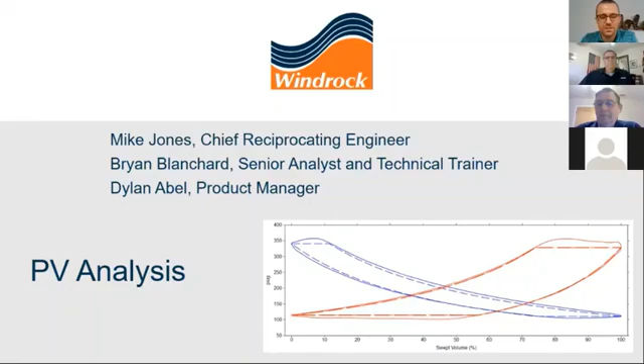My name is Dylan Abel. I've been at Windrock for about 8 years now, worked a few different positions from online systems engineer, doing installation and commissionings in the field, tech services manager, and now most recently I'm our product manager. Now I will hand it over to Mike for his introduction.

Hey guys, it's good to see you all again. I'm Mike Jones. I've been with Windrock for 15 years. This is my 15th year, and including the time that I spent mechanicking and doing analysis, it'd be 50 years in July. And I've used all kinds of analyzers and tested just about any kind of compressors and engines you can think of. So I'm really excited to be able to help you guys while we're sitting at the house doing homework anyway. So this is really a nice venue. I appreciate you guys coming and joining us.

Thanks, Mike. Now we'll hand it over to Bryan here. Hey, good morning, guys. Bryan Blanchard out of New Orleans, Louisiana. Been in the industry for about 45 years. Been analyzing about 39. Good to have everybody here. Hopefully we can teach you a little bit something.

All right, awesome. Thanks, Bryan. A little outline of what we'll go through today. We'll go over a little bit of company background and our product portfolio, just kind of quickly here at the beginning. Then I'll hand it off to Mike and Bryan, who will go through PV diagrams and curves, actual versus theoretical, some of the calculated parameters, and then fault diagnosis.

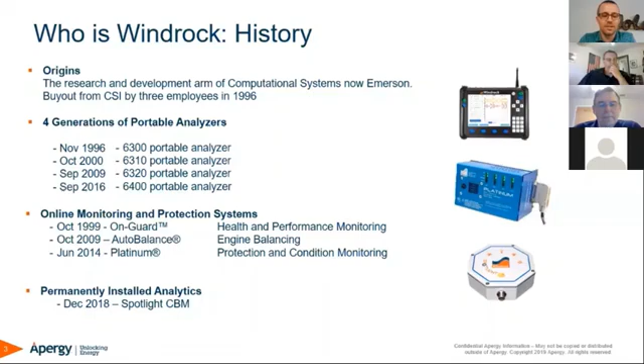And then our newest product is Spotlight. We've got Spotlight for both compressors and high speed engines. We'll deep dive into each of these momentarily.

So starting with Platinum here, it's really our Cadillac system. It's collecting data almost every second. It's got real-time data being displayed, and it also works with the Auto Balance for those integral engines.

Moving down, we've got Spotlight. It's an IoT-enabled system. It's really kind of a plug and play, easy to install system. We can go out on a compressor, on a 4-throw compressor, have it up and running in a few hours. Low cost system. You can see all your data remotely. We have a dashboard, which is called Windrock Enterprise, where you can see not only your entire fleet, but you can drill down into just one single machine. And then we have our 6400 portable analyzer, which you can go out and collect data on multiple machines.

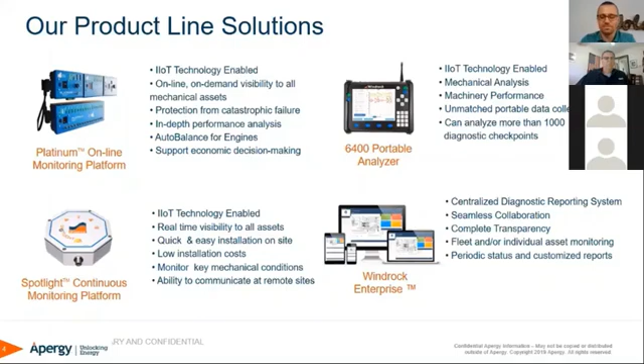Our products are used across various assets. For the critical assets, those machines that really require real-time monitoring, protection, you want to shut down at the sign of a catastrophic failure, or before a catastrophic failure, we recommend Platinum. There's probably about 20% of the assets out there. And then for all those essential assets where you want to monitor the system, but you're not interested in the protection aspect, that's where Spotlight comes into play. So we can monitor an entire fleet and let you know when a problem may be occurring.

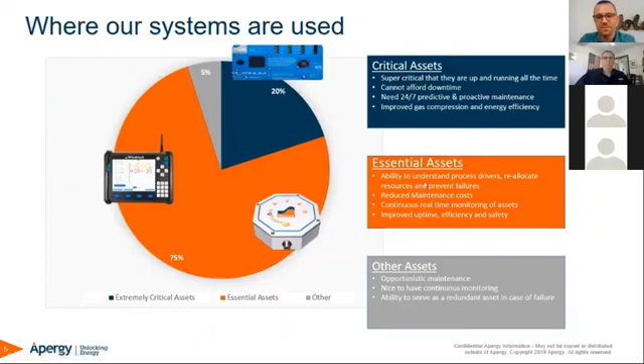And at this point, I'm going to make Mike the host, and he will get started on the PV analysis.

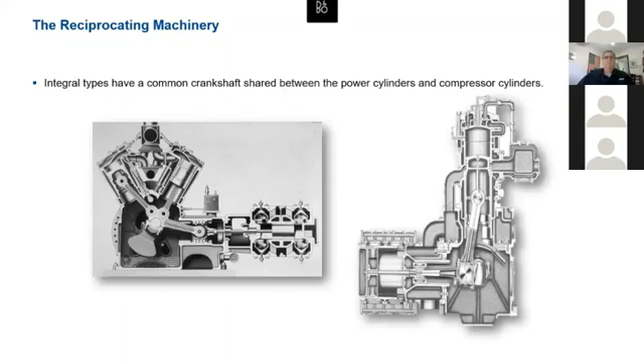So we've got PV diagrams. It doesn't make any difference what kind of compressor you've got, an old slow speed integral or a separable high speed, the PV diagram is the same for everything.

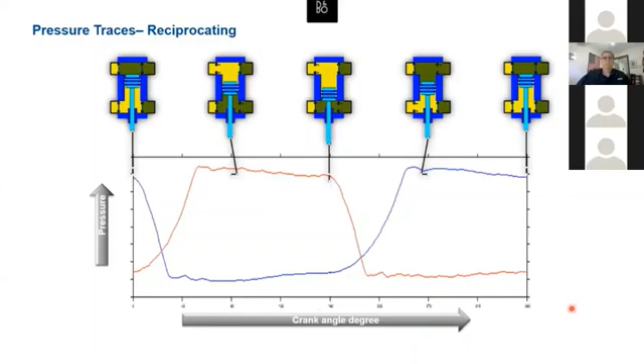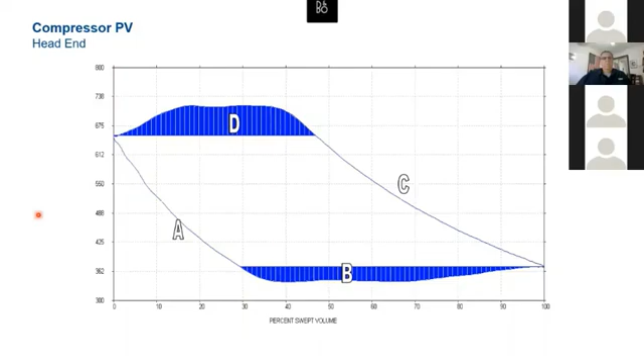And there's the same thing on the crank end. While the head end's working like that, when we go from top dead center to bottom dead center, we're compressing gas on the crank end, discharging, re-expanding, and bringing in suction. Doing just the opposite of what we're doing on the head end.

Now one of the main calculations we get out of that is the horsepower, your indicated horsepower. Now all this area inside this PV diagram represents work, including these shaded areas. These shaded areas are actually power losses, but they're included in the horsepower. So all that area in there is work.

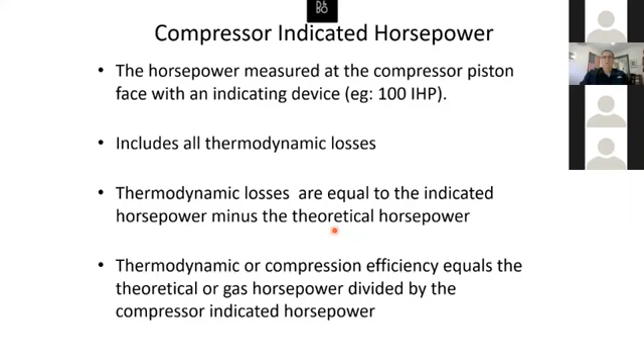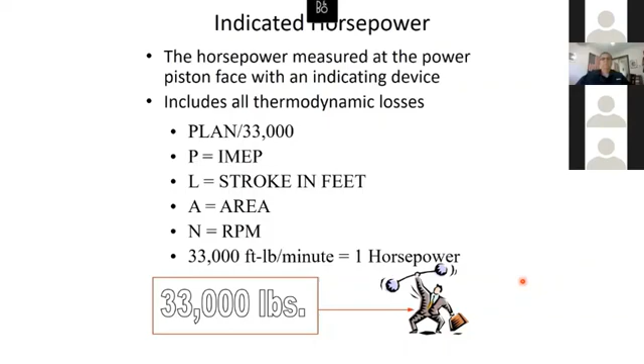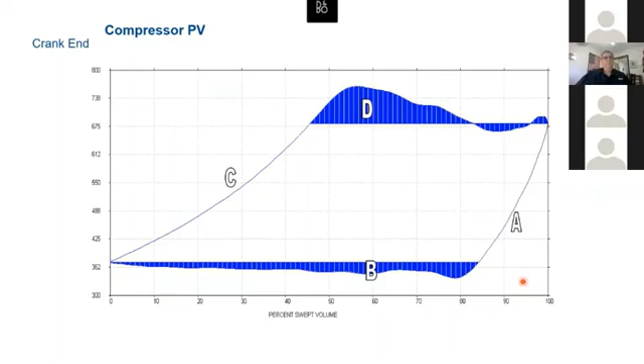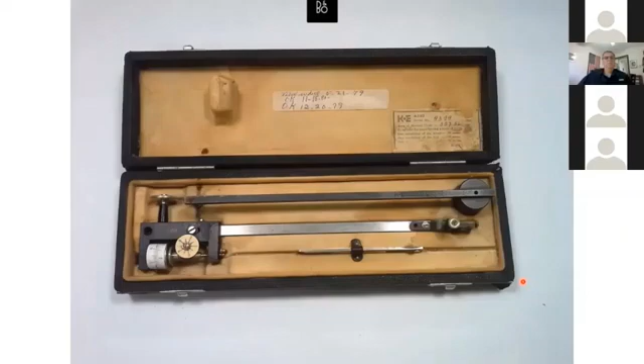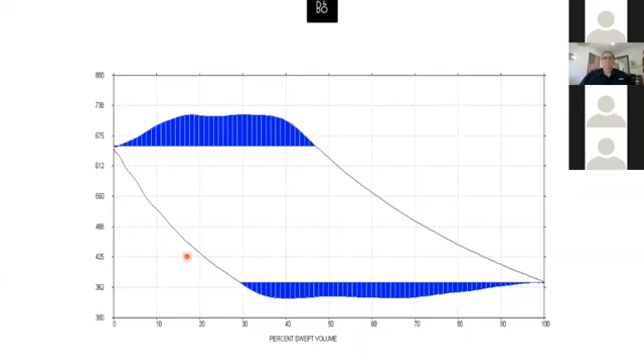Now, in the old days, we'd take that PV curve, which we got by various means, sometimes an old XY plotter or something like that hooked up to an analyzer. And we used a polar planimeter. With the planimeter, we actually measured the inside area of the PV in square inches and then converted that into indicated mean effective pressure. We'd anchor the thing, set the beam for the scale, anchor it down, and trace the PV in order to calculate the indicated mean effective pressure.

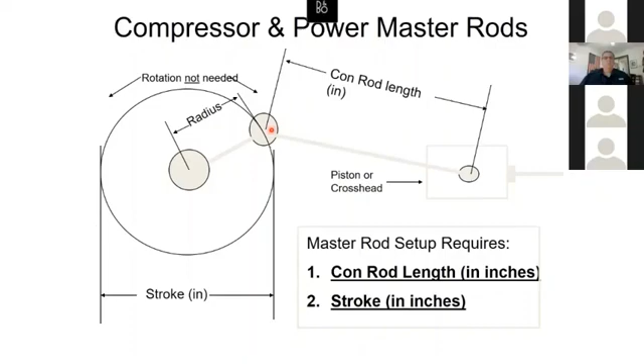Now the way we're doing it nowadays, we have to have certain information to put in there. We need the connecting rod length and the radius of the stroke in order to calculate what the piston position is going to be at every degree of crankshaft rotation. Because this is the speed of the piston, and it's not the same for every degree of crankshaft rotation. It's speeding up, slowing down, speeding up, slowing down. We can see with bottom dead center and top dead center, places where it flattens out where we're not moving much per degree of crankshaft rotation. So the analyzer has to know that so it can calculate how far that piston moved at every degree of crankshaft rotation.

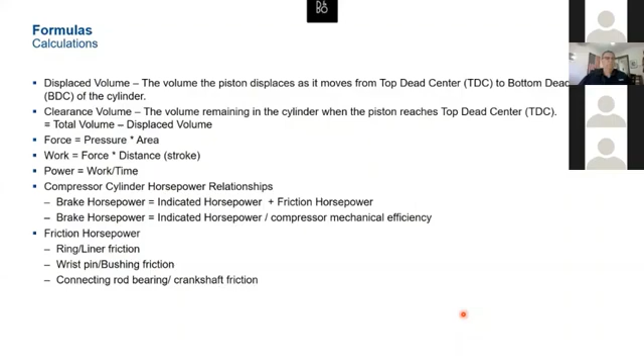Because what we're actually doing is measuring force, which is pressure times area. The analyzer can do that for us. We know the area of the piston face, we know the pressure at every degree of crankshaft rotation. But what we have to figure out in order to calculate our horsepower is work. That's force times the distance for the stroke, but at every degree of crankshaft rotation. So we have to know the distance that piston moved every degree so we can calculate horsepower. Then power is work divided by time, which is 33,000 foot-pounds of torque per minute. Once we get all that done, it's pretty easy to calculate horsepower. It's very dependent on your TDC setting. If your TDC is off, you're not going to calculate horsepower correctly.

Now we talk about suction volumetric efficiency. The suction volumetric efficiency is the percent of the cylinder's end displacement that the piston passes through if you draw an imaginary line from the suction pressure to the expansion line. Discharge volumetric efficiency is the percent of the cylinder's end displacement that the piston passes from the discharge toe imaginary line where it meets the compression line.

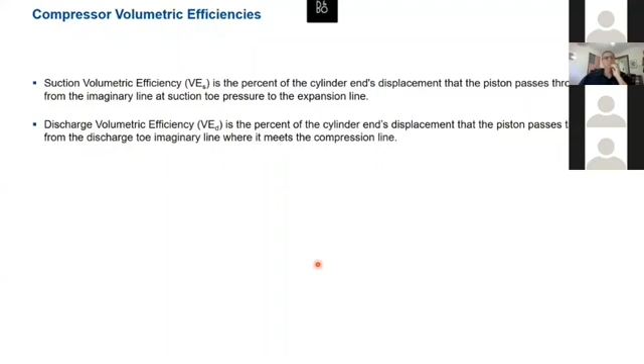So what we do here, we go from toe pressure on the discharge, draw that imaginary line till we meet the compression, then draw it straight down, and then we can calculate the volumetric efficiency. This is the actual percentage of the swept volume that we use to move gas in this cylinder based on your clearances. Same thing on the suction — we calculate the volumetric efficiency from the suction by going from the suction toe, drawing our imaginary line all the way till we reach the expansion line, and then measuring that down on our percent of swept volume. We used to have to do that with a Polaroid photograph and a ruler to figure all this out, and the oscilloscope screen had graticules on it to help us calculate the volumetric efficiency.

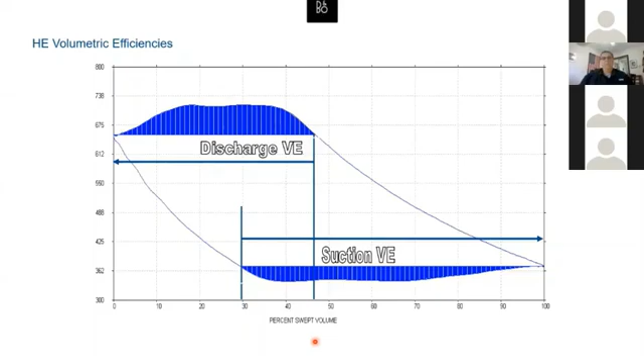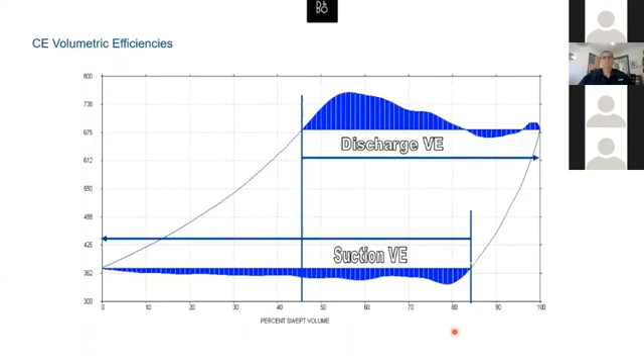We're lucky now that we can do all that with the computer. We just poke the button and we get horsepower. That's fun. Same thing when we're looking at the crank end — we draw the imaginary line from the toe on the suction to the expansion line, measure the volumetric efficiency at that point, and then we take the discharge volumetric efficiency from the toe to the compression line and do the same thing.

The reason we do that is because we have to have the volumetric efficiency in order to calculate the throughput, or the capacity of the compressor, based on the volumetric efficiency. Actually, it's based on the displaced volume times the volumetric efficiency times RPM times 1440, which is the number of minutes in a day. Then we go through a pressure correction and a temperature correction divided by the compressibility factor. The pressure correction and temperature correction turn it into standard cubic feet a day. This corrects whatever readings you took back to sea level at 60 degrees Fahrenheit.

So that gives you the 14.696, or whatever your sea level pressure is, and then it's 60 degrees, and it's going to correct everything back to that so we can have standard cubic feet.

But from the PV, the main thing we get from that is the volumetric efficiency. There again, your top dead center, and a lot of different things go into calculating your capacity. Other things you may have to look at are your temperatures, your gas sample, and several other factors. The linearity of your pressure transducer, several different things in there.

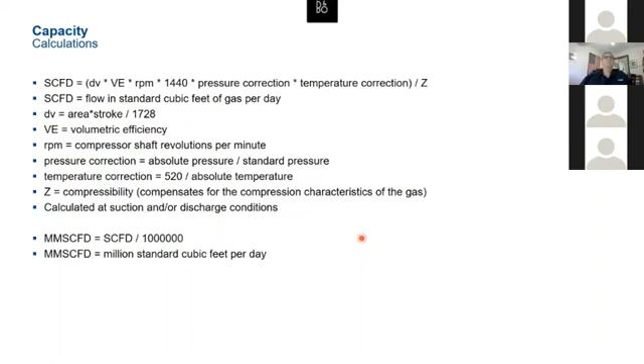One thing to remember when we're using calculated capacity: suction calculated capacity goes up with a suction valve or packing leak, or anytime you've got high pressure gas leaving the cylinder. Suction calculated capacity goes down with a discharge valve leak, or high pressure gas coming back into the cylinder. Discharge calculated capacity goes up with a discharge valve leak. Discharge calculated capacity goes down with a suction valve leak or a ring leak. Just the opposite.

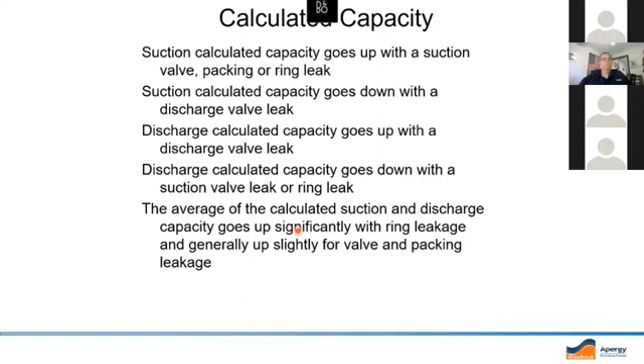Now, the calculated capacities go up or down, but the actual capacity is going to go down no matter what kind of leak you have. The average of the calculated suction and discharge capacity goes up significantly with ring leakage, and generally up slightly for valve and packing leakage. But your actual capacity always goes down.

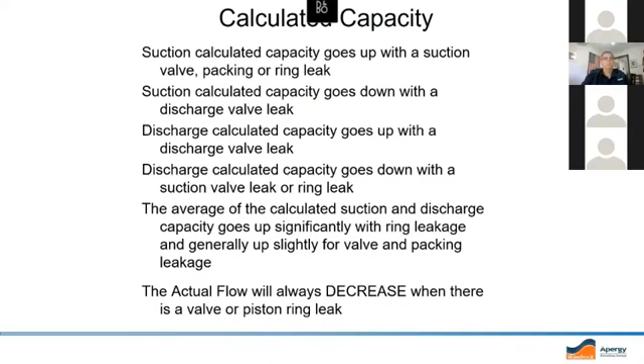Here's things that affect your capacity calculations: a distorted PV due to an inaccurate top dead center, distorted PV due to channel resonance, toe pressures, volumetric efficiency, temperatures from the nozzle, gas properties, pressure zero offset, or pressure transducer linearity. These are just eight of the things that may affect your capacity readings.

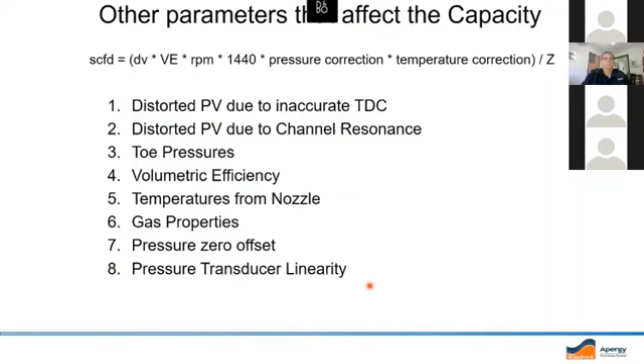Now your flow balance is also calculated from those capacity readings that we use the PV for to obtain the volumetric efficiencies. So the flow balance is just telling you the difference between your calculated suction flow rate and your calculated discharge flow rate.

A result greater than 1 indicates gas leaking out of the cylinder into a low pressure area. A result less than 1 indicates gas leaking into the cylinder from a high pressure area. If you think about it, those are really the only two leakage patterns you can have: gas coming in or gas going out.

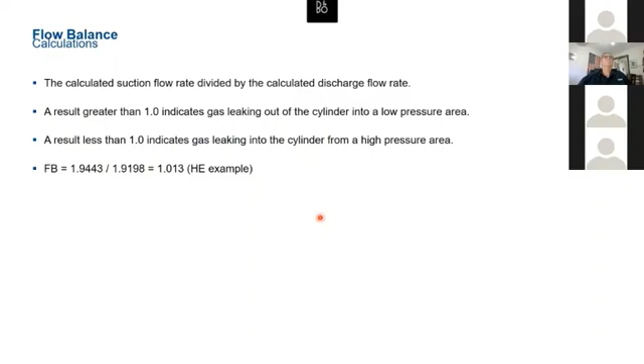Your accurate flow balance is dependent on the accuracy of the TDC reference. That's probably the most important thing you want to make sure is correct on your PV card - the TDC reference. Also the toe pressures, suction and discharge temperatures at the valve ports, gas compressibility, and volumetric efficiency picks.

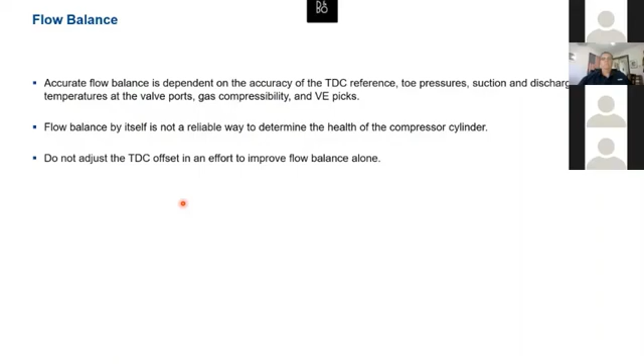I want to stress that flow balance itself is not a reliable way to determine the health of the compressor cylinder, and you never want to adjust the TDC based on that.

Another thing we're looking at when calculating capacity is the Z factor, the compressibility factor. It's the ratio of the molar volume of gas to the molar volume of ideal gas at the same temperature and pressure. It's a useful thermodynamic property.

Actually, the Z factor is a fudge factor. It's saying that the gas sample you're compressing has characteristics that don't really match up with the ideal gas law, so they modify it a little to make it match up.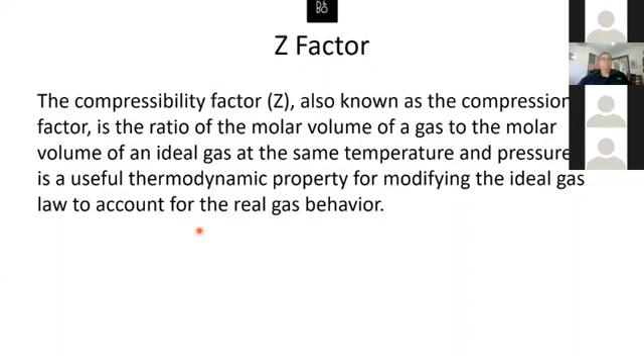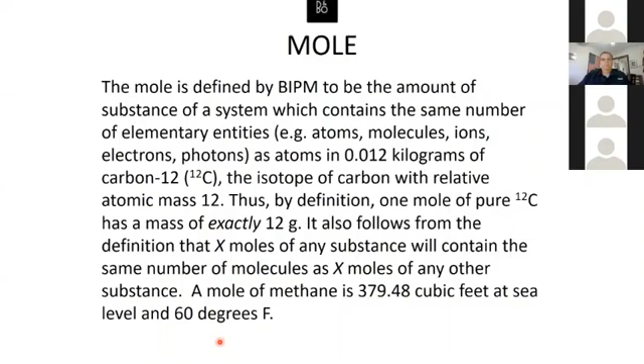When you're talking about molar volume of ideal gas, this is where it comes from - it's just the amount of any substance that has the same number of molecules as 12 grams of carbon-12. So going by that criteria, a mole of methane is 379.48 cubic feet at sea level and 60 degrees Fahrenheit. That'll give you an idea of what a mole is.

Here's the ideal basic gas law. It says the pressures, the volumes, and the temperature should match up from suction conditions to discharge conditions. If it doesn't, that means the equation isn't balanced - it means there's leakage, or temperature entering or leaving the process, which there's always some of. But with a compressor cylinder, the turnaround is so quick when we compress gas, expand it, compress it, expand it, that the temperature entering or leaving the process doesn't really factor into the calculations at all. It happens too quickly.

Okay, now here's another example where we've got the Z, or compressibility factor, on the discharge side, and a compressibility factor on the suction side. This is Z standard on that report, which is what the compressibility would have been had that gas mixture met the perfect gas law, but it hasn't, so we have to fudge it a little bit to make it work out. What they say is this tells you the compressibility of the gas under field conditions rather than laboratory conditions.

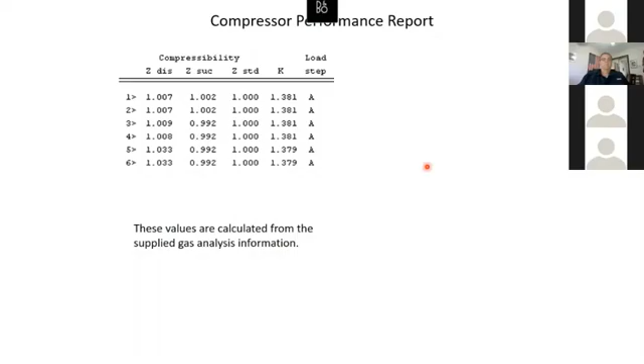We've got equations of state, as we call them, where we calculate the suction and discharge compressibilities. These are some of the different ways we do it. We use the Benedict-Webb-Rubin equation; I think 1987 was the last update on that. That's the one we use.

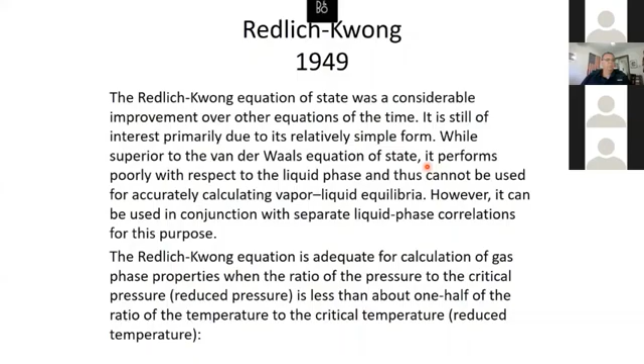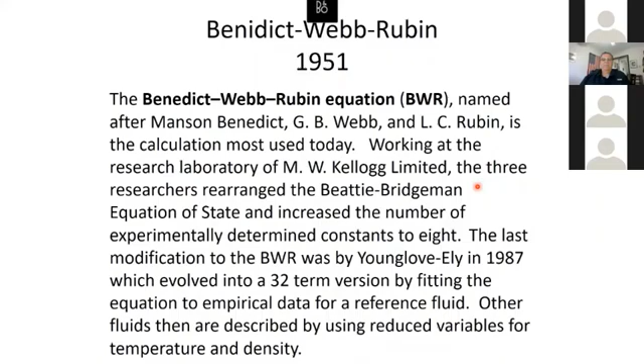And if it won't match up on that, then it goes all the way back to the Redlich-Kwong, which is a very simple one. So we have three different ones. We'll also use the Beattie-Bridgeman as another one. So we have three different equations of state in there. It uses the most modern first, and if it can't do a calculation with that, it'll keep scooting back to the Redlich-Kwong, which actually anybody can make an equation of state out of.

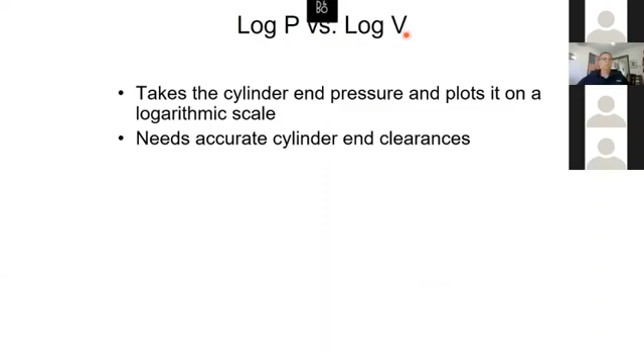Okay, now here's a cylinder end plot. What we do is plot it on a logarithmic scale. This is your log P versus log V, which is logarithmic pressure versus logarithmic volume. So this is actually a pressure versus volume trace.

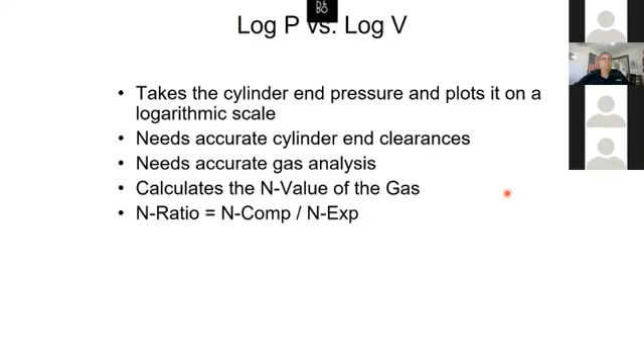For that, we need to take the cylinder end pressure and need accurate cylinder end clearances. That is very important. We have to have an accurate gas analysis. It calculates the N-value of the gas, which is a polytropic calculation, and what it's doing is predicting the compression line and the expansion line in order to line those things up so they can be parallel to each other. If they're parallel, then you're looking at a normal cylinder there.

We use the N-value quite a bit when we have high compression ratio, low throughput cylinders. Your volumetric efficiency picks could be kind of iffy in that type of situation. And we found out that the N-ratio, as long as we have the right clearance volumes in there, works better in that situation.

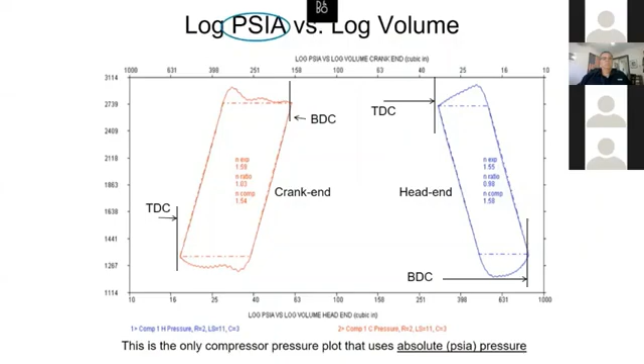Here's one. The N compression and expansion values are derived from the actual slopes of the collected indicator card, in log. Now you'll also notice that when we're in log here, this is the only plot that the analyzer puts out that's actually in PSIA, or absolute pressures.

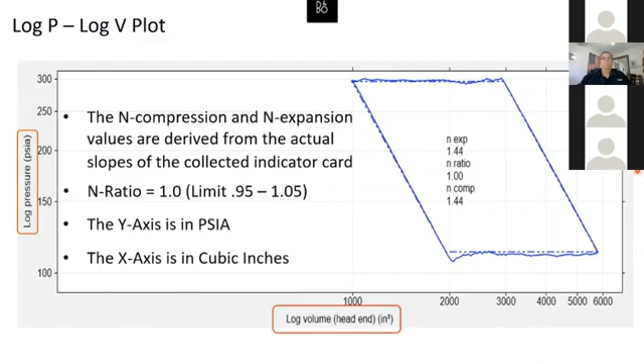Okay, we already did that. So this is where we can pull up the clearances, and we can see the calculated suction, the calculated discharge clearances, and those should be pretty close to each other on a healthy cylinder. And the one we want to use is the average calculated clearances, so that we can draw a really good PV card. If you think about it, if you've got some leakage, these are going to be off—the calculated suction and calculated discharge will be different from each other, but the average is average. So it'll still give you a fairly accurate look at your log.

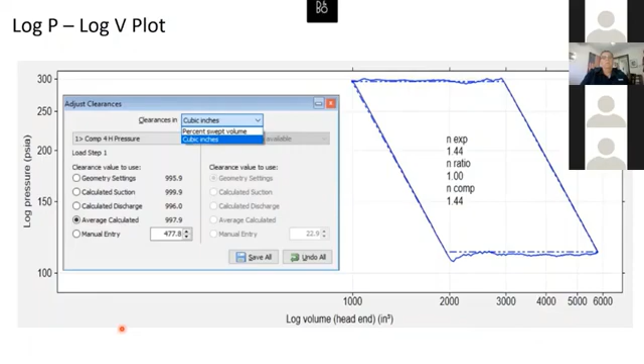Okay, you're calculating your cylinder end clearances. Thank goodness the analyzer does that for us, but we've got two different methods. We've got the GPSA model, or method, out of the GPSA Engineering Data Book, and that formula is actually modified by the compressibility factor. Some gases that doesn't work real well for, so we have a modified Southwest Research method, 84-10a, which uses their formula, and then it's modified by the ratio of specific heats, or the K value.

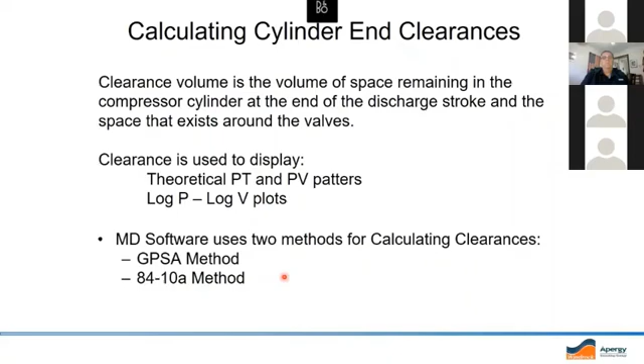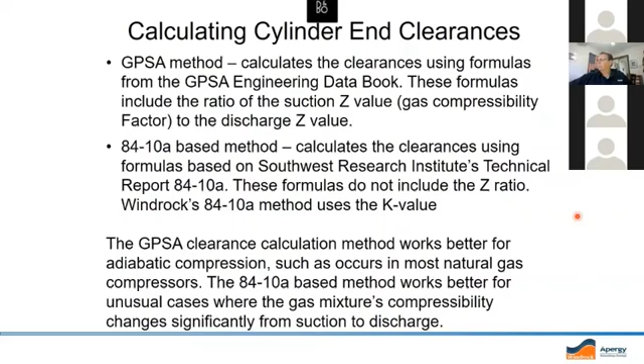So here again, we've got some things going on here. The GPSA works better for adiabatic compression, such as occurs in most natural gas compressors, and the 84-10a method works better for unusual cases where—and this is the kicker—the gas mixture's compressibility changes significantly from suction to discharge. Like when you hit up around supercritical on CO2 or something like that, then the 84-10a will actually work better than the GPSA. And it's actually pretty easy to tell—you just switch back and forth between them and use the one that gives you the best calculations. There's no real big rule of thumb there.

And this is kind of what we're looking at here on these N values. After we get the correct clearances and everything in there, and we've got a healthy cylinder, we've got the polytropic calculation, and these are from the slope of the lines. So we're looking at the expansion and the compression, and those should match up fairly close to what your K value is.

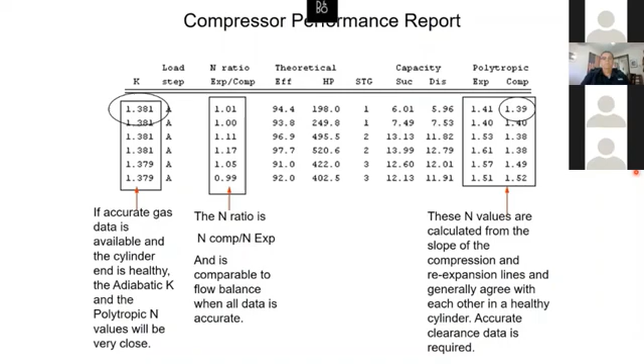Okay, here's a list of things that we can tell from the log P versus log V. Leaking rings - the compression and/or expansion events do not follow straight lines, and this is true with just about any kind of leakage you've got going on. The slope of the compression line decreases, the slope of the expansion line increases, and the N ratio increases. Leaking suction valves, the N ratio increases. Leaking discharge valves, the N ratio decreases. A packing leak will look just like a suction leakage.

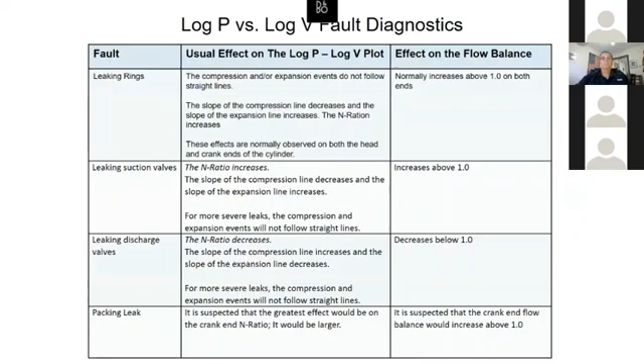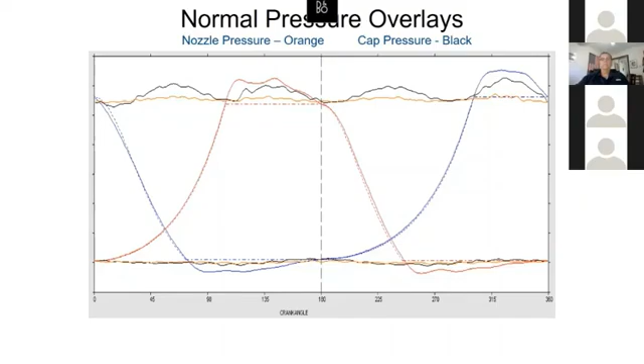I think Brian's taking care of those guys that are raising their hand, aren't you? I am, Mike. You're the man.

All right, excessive valve loss, passage loss indicating from a 10% rule of thumb. Actually, for valve losses on a slow speed integral, we would like to see, right straight out of the factory, brand new unit, 3% or less. High speed units, the rule of thumb is actually 12%, about 12 to 15, because I see them 17 to 24% all the time, and that's about the best you can get off some of those high-speed units. And it's all dependent on the valve lift and flow area, the spring tension, foreign material - PT and PV curves appear rounded during the suction or discharge phase.

Verify with nozzle pressure as close as possible to the valve, and that's the kicker right there. In order to tell whether we've got valve loss or restrictions in the line downstream or upstream of the valves, we have to have these nozzle traces in order to figure that out.

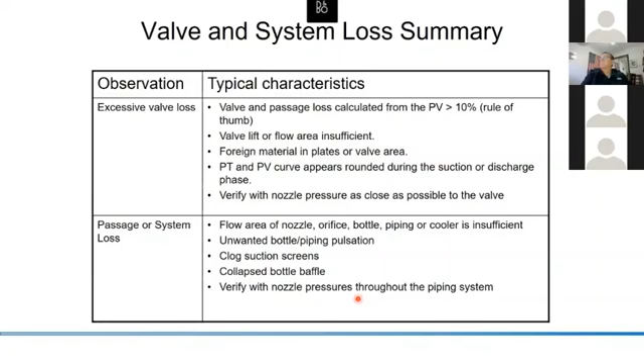Then we've got flow area of the nozzle, orifice, bottle, piping, or cooler being insufficient - unwanted bottle or pipe pulsation, clogged suction screens, collapsed bottle baffles. Verify with nozzle pressures throughout the piping system. So you may find out that your cooler out there has had too many coils plugged, and that's what's causing your restriction.

Okay, and these are on your report - these are your valve losses calculated from that, and these losses are actually a percent of valve loss. Like on the discharge here, this is 13.3% of the indicated horsepower, is what we're looking at here. So you add the discharge and the suction together to get your total loss, and that's what would have to fall into the criteria of 3 to 4%, or 12 to 15% total loss, adding those two together.

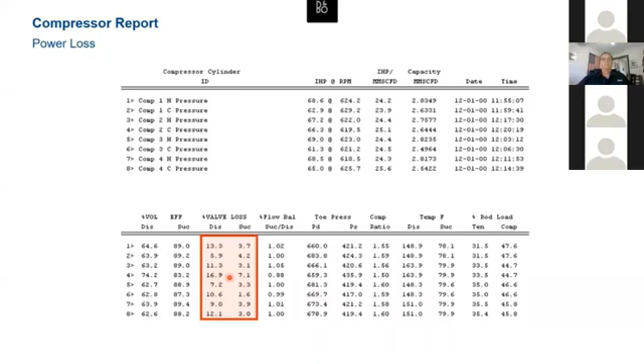Okay, let's look at some of the leakage characteristics of the PV curve. And when we compare those to theoretical, the leaks really show up. So the main thing you can take away from this is that leakage can only occur from a high pressure to a low pressure - it's like water flows downhill. And a valve only leaks when it's closed; an open valve doesn't leak.

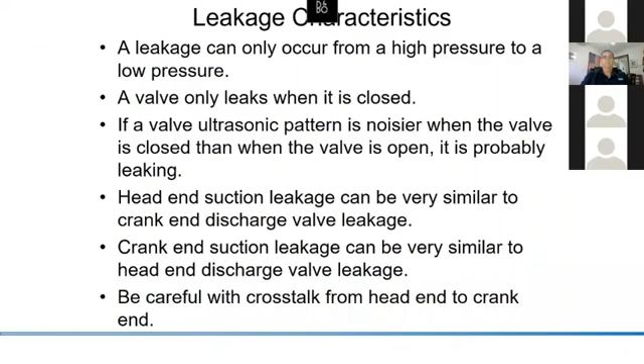Okay, here we've got the various kinds of leakage that you can have. We can have high pressure going out of the cylinder, high pressure going into the cylinder, internal leakage where gas is moving back and forth across the piston rings, or some external leak, going across the packing or out of a flange or something like that. So those are the types of leakage we can have.

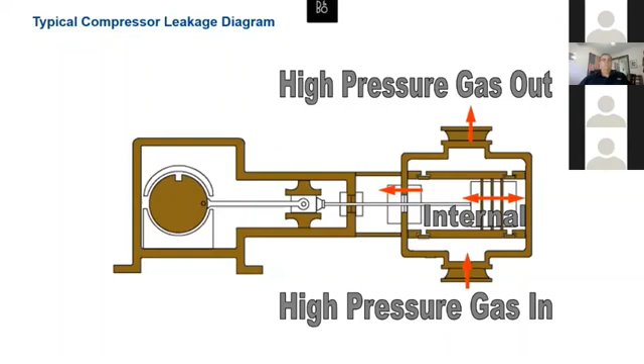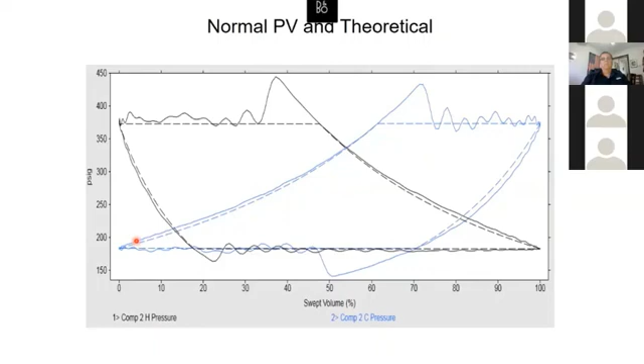Okay, if we look at this, it's an unsmooth one, but you can see where our theoretical clamps down pretty close to the toe pressure area. We've got a little bulging going on in there, but that's really insignificant on this type of cylinder, as long as everything matches up.

Now if we pull up a pressure versus volume trace against the theoretical, we can really see suction leakage going on here. We can see that because we have a greater volumetric efficiency. Remember, our throughput is calculated from the volumetric efficiency. So when we over-calculate volumetric efficiency, that means we're recycling gas in the suction and starving the discharge. That's suction leakage — whichever one has the greater VE over what the theoretical would be. And again, these theoreticals are very dependent on your gas samples and your clearance volumes, so we want to make sure those are all correct.

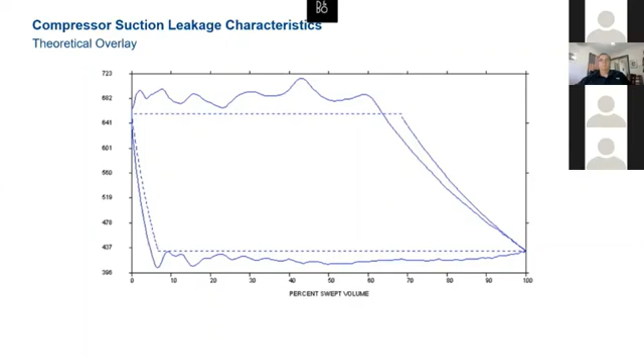This is a very useful tool. This is one of the most useful tools you have in your kit.

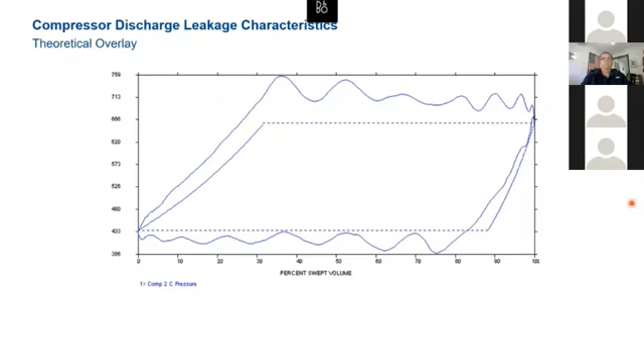Okay, then the good old ring leakage, which everybody has a hard time finding. But against the theoretical, if you pull that up, it really is easy to tell because we've got this big bulbous nose here on the toe, and you can see where it deviates away from the theoretical until we hit pressure reversal. When the pressure reversal happens, the pressure starts getting higher on the other side of the piston, meaning we have gas leaking the other direction. Then it starts moving its way back to the theoretical — it almost gets there before we reach discharge conditions. But on the head end, we can see the same thing happening, and it actually crosses over before it gets to discharge conditions. So this is your classic ring leakage pattern here.

You can even see that without the theoretical, but when you throw the theoretical on there, it really makes a big difference in being able to diagnose it. And that's about all I got, guys.

How long did we go? What do you think, guys? About 37 minutes. I'm still answering some questions here. We can take some questions now. Got any that I can answer? We can just read some of those questions out loud, Brian, and then tag team answering them. We've got about 20 minutes or so. Yeah, one question was...

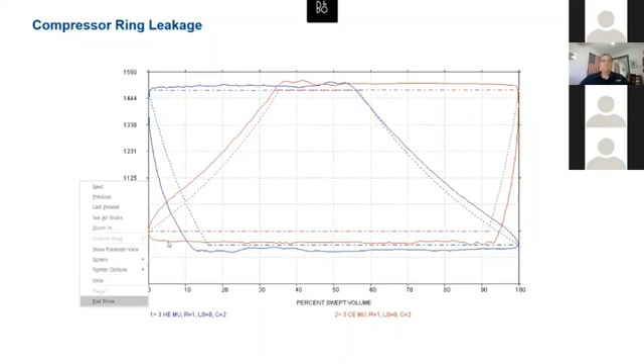Could you pull up a PV card here and kind of explain leak index? Let me see if I can get out of this here. Okay, what we got here? Yeah, we'll just pull this one up right here.

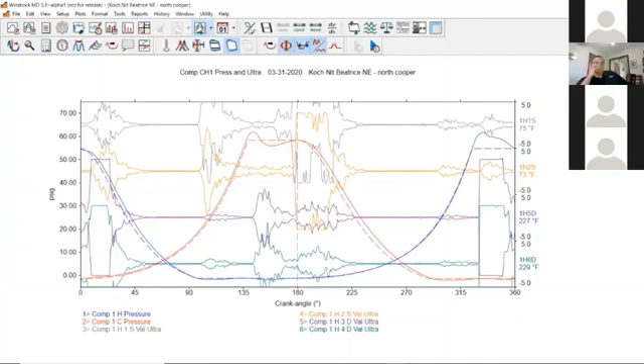So what the leak index is actually doing, it's coming a designated percentage lower than the discharge toe point, and a set parameter higher than the suction toe pressure, so that your toe pressures and volumetric efficiencies don't play into it.

So what the leak index does, it does about a dozen calculations back and forth across that PV, and during those, we're talking about capacity calculations. So during those dozen calculations or so, if it sees high pressure gas leaving the cylinder,

then during those dozen calculations, then we can call that a suction leak. If it sees high pressure gas entering the cylinder during those dozen calculations, then we can call it a discharge leak. Then if we see high pressure gas leaving the cylinder for a portion of the stroke and then re-entering, then we can call ring leak.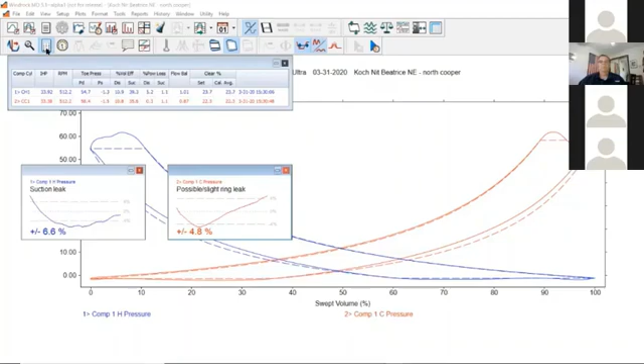So it can be very good. The thing about it is, though, it needs to be tweaked for the type of cylinder that you're running. Like here, if we got a high compression ratio and we have a low throughput, then we can go to our setup in here in the software options, and we can go to leak index here, and we can actually tweak those as far as the sensitivity, either higher or lower,

because the high skinny PVs here are going to be a lot more sensitive to leakages, and the low squatty ones, the low differential high throughput cylinders, are very insensitive to leakages. So you need to increase the sensitivity on the low ratios and decrease the sensitivity on the high ones. Wait, no, decrease the sensitivity on the low ratio, increase the sensitivity on the high ones.

You got anything to add to that, Brian? Yep, that's good.

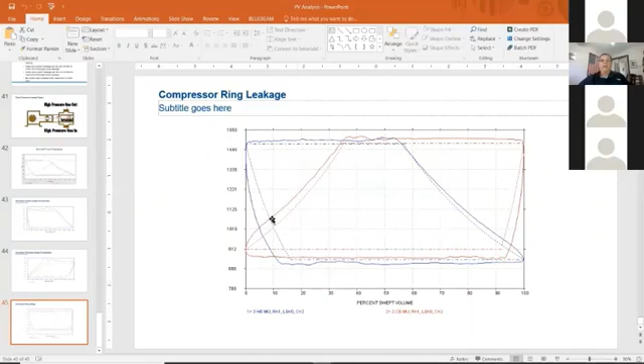Can we tell leakage based on the suction VEs and the suction and discharge toe pressures? I'm not sure I understand what we're talking about there. I guess he's wanting to look at the VEs and the suction and discharge toe pressures to try to tell leakage, which is fine. You can do that in a way, but we have better tools than that.

We have flow balance, leak index, and of course N ratio, where we can tell valve leakage. So the computer's going to look at these toe pressures and VEs, and then it'll calculate leakage by the flow balance and the N ratio and the leak index for us. So we don't really have to do that.

You just have to make sure that the data you're bringing in is correct. That's the key.

So that goes into our next question. Can you show how to verify top dead center with a PV diagram? With a PV diagram? Oh.

If your flow balances it off, if I know my volume, if I know my clearances are right and my theoretical is going to be right, you can verify it by looking at your PV to your theoretical there, and you can actually move your top dead center till, as long as you're in a healthy cylinder, you can move it to match your theoreticals to get real close to your TDC. Then we have other ways of doing it besides that.

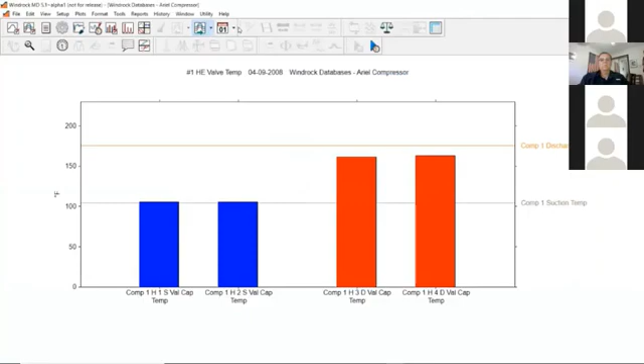So let's look at this right here. Okay, this is a very healthy cylinder. So this is what you'd want to start with if you're going to be manipulating your top dead center.

What we want to do now is look at our leak index, and mainly we want to see the flow balance and see the clearance calculations there. Next thing we want to look at is pull up our clearances. I'll put it down here because this gets kind of busy before we get done. And then we want to go into the modify remove line.

Now if you look at these calculated suction, calculated discharge on our clearances, this is in a healthy cylinder - to get the right top dead center, these will be very close to each other.

Okay, we can go right down here to modify the offset, and let's move it, say 3 degrees forward, which would be to the right.

Get the update - you can see our flow balances went out on us. If we had the full report up, you can see your horsepower percentage of your rated load would be moving on you too. But the main thing is here on these high-speed units, the calculated suction and calculated discharge are getting further away from each other. See, when I do that.

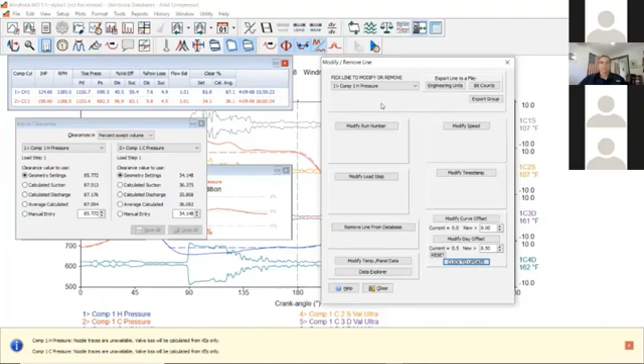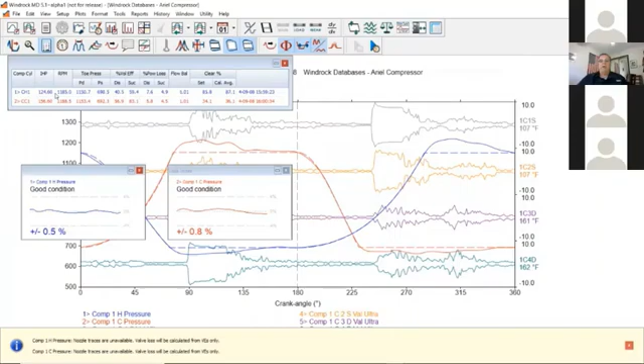do you have any advice on adjusting the VE toe pressures, or what drives the decision to adjust them at all?

So we do have the capability of adjusting the toe and the VE on a PV card. So if you go to the PV card, you see, why would you adjust it? Well, we can.

Well, we get some every once in a while, and I'd have to dig for it, but I've got some in there. We're looking at okay, where our toe picks are.

Okay, you see where that's lining up, those little dots - those are perfect. That's exactly where they're supposed to be.

Sometimes we get a really wild spike up here on this end. It's going to pick the toe up here, and we can visually see that volumetric efficiency pick is not going to be good. So you can actually grab that and move it down to where it should be,

or you can use the little spinner boxes up there to move it. But if you look at it, and if you've got a high area in here that's causing it to be off - or sometimes on the suction side down here, we get a loop in the pressure, like right here. It will extend higher than that, and it will actually pick that as the expansion line.

So that blue dot that we're seeing there will actually show up right here in this area, and your calculations will be off and everything will look nutty.

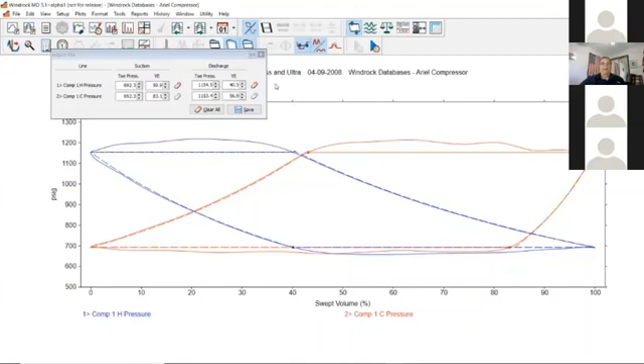Does that make sense? Yeah, and I guess that kind of answers the other question that was asked - can you discuss the loop seen at the toe on some traces?

Yeah, it's a pulsation going on in there. If you can't smooth it out, then you're going to have to move the toe pressure to take care of it.

Another question is, how can I see some of those get a big loop? Here, let me turn that off. See, now this one here would have it - if I didn't have it smooth enough, I'd have a loop here and a loop down here. So make sure you put enough smoothing passes in there to take care of it.

Maybe you could show how we use the smoothing function here. If you turn it back on and go up and down until we get the yellow. Yeah, there's actually several different ways of doing it. Like this one here, I got it at 14. That's probably a bit much, but okay, we'll enable the smoothing.

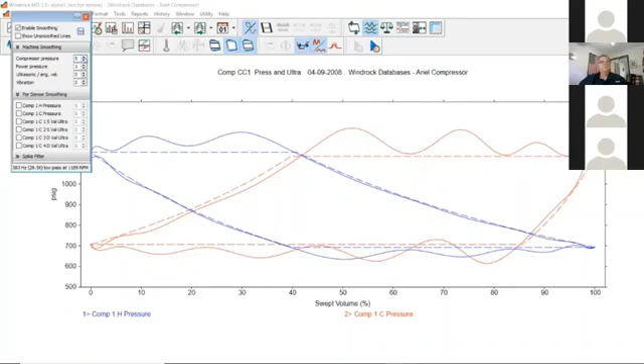Yeah, this is pretty high speed, so we can click this to increase the smoothing passes on it. Like Brian said, you hit the yellow and then you back off one. That's the way most people do it, and that's still very good. That's a good one there.

Most Ariel compressors, because of the dynamics of the tube, the valves, kidney valves, and everything else on it, about 12 passes is what you need for 1200 RPM. At 1000 RPM or so, you may only use 10 passes, because a lot of that's dependent on the RPM too.

Yeah, basically, we're trying to smooth it to where we get our toe pressure to match our actual gauge pressure or bottle pressure - pretty close. We just want to make sure we don't have any interference on that pick.

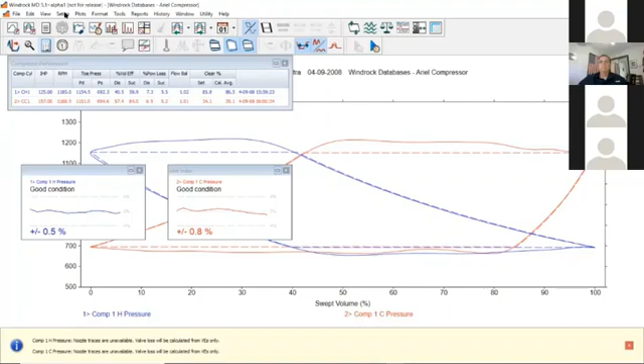So how about the leak index? Do we add smoothing to the leak index? Yeah, we can. We can actually add a different one to that than you use for your normal smoothing. We can go up to the software options, our leak index, and right here we can...

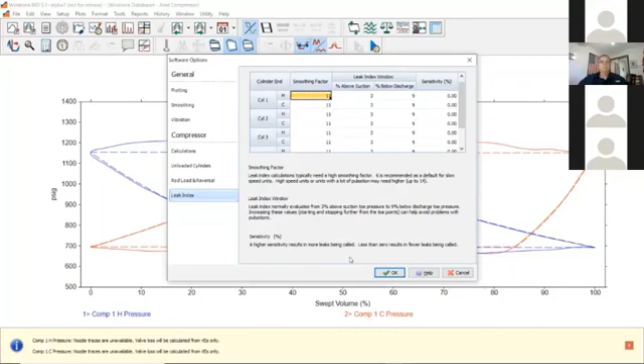Where is it? Did we lose that feature in our new software? Okie dokie. Yeah, I think it's now using whatever you put in there. So it was 11. Yeah, so it's using 11 there. Let me - yeah, this is brand new beta software, so we'll pull up the other one.

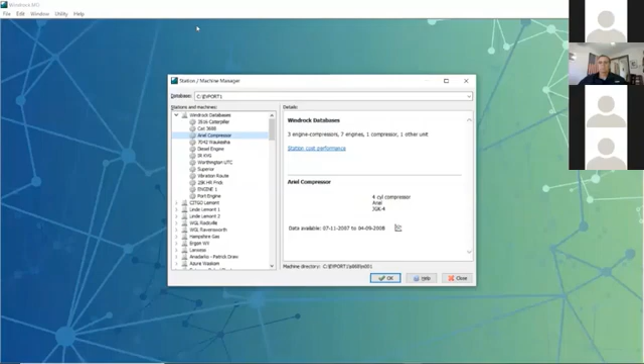Okay, now we'll go to setup, software options, leak index, and then here we can put in a smoothing factor separate from the one that we're using. This is the current version of the software, so we'll have to find out from the software people what we're using now with the newer beta model. I'm sure it's probably using the general one that we put in for regular smoothing instead of having a separate one for it.

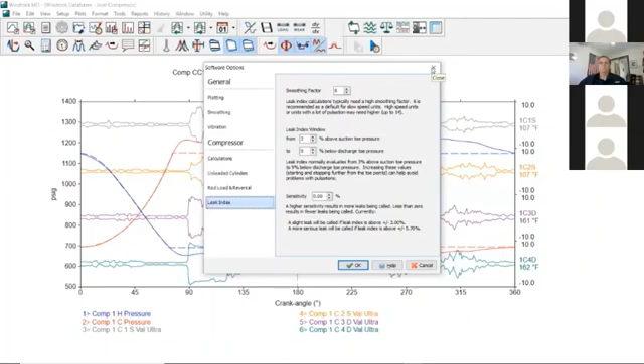Yeah, that smoothing is real important for rod load and leak index. Okay, I think we have time for maybe one or two more questions. I see it's 10:57 right now. Okay, I got a question.

Somebody's wanting to know if the pressure curve changes depending on the type of valve, plate or poppet. Oh yeah, the pressure will change because some of them you'll have a lot higher differential pressure to get the valve open, and some will have more losses, some less, depending on the valve. You've got some really highly efficient valves out there, and some that are not so efficient but last a long time. So it just depends on what you're concerned with - efficiency or being able to stay home on the weekend. But yeah, your valves will make a big difference.